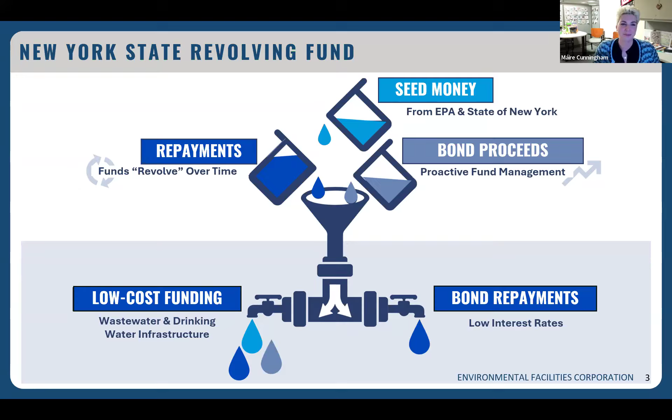We do a lot of water and wastewater projects at EFC. It's been really interesting seeing statewide the different needs that different municipalities have. As you can imagine, the infrastructure needs for New York City versus Schenectady versus maybe a small rural village in upstate New York are all very different.

We're going to talk a little bit about where your drinking water comes from, what the distribution system looks like, how that water is treated, and different aspects to the residential home. And then we will talk a little bit about the back end, about developing wastewater.

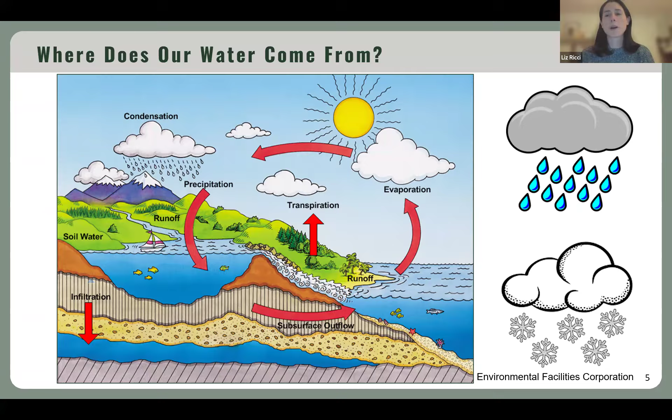So I love this picture because it makes me think of middle school or high school, but in general, where does our water come from? You're going to have this standard water cycle where it comes from rain, from snow, and eventually it will go into our surface waters and groundwater. Eventually you have runoff, evaporation, and it's just this constant cycle that will eventually add to the available water source that we have for municipal treatment systems. But for the most part, most of our water does come from rain and snowfall.

So in general, drinking water source can either be from a surface water or a groundwater source. If you're going to be building a brand new treatment system, or you have new development in an area that doesn't have municipal water, and you need to find a water source for that area, you're going to be looking at your options and determining your best source. You're going to be looking at quality, you're going to be looking at quantity - like if you're going to drill a well, is there going to be enough water to be able to provide those users that you need to serve from that well?

The treatability of that water source, how you treat a surface water source versus groundwater, is going to be very different. The New York State Department of Health regulates these public water systems and has specific requirements to make sure it's safe for the end user to drink. You can have different treatment systems for residential versus a municipal village or city, and those requirements differ because of the quantity of water you're creating.

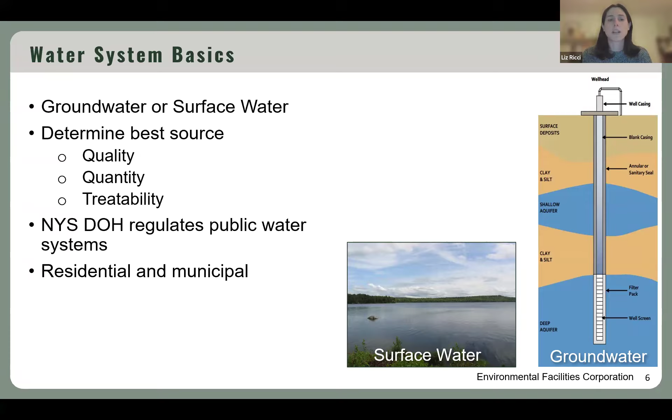So for folks on this call, when we talk about a surface water source for drinking water, we're talking lakes, reservoirs, rivers, and streams. We'll also use the term surface water on the wastewater side, for the final end discharge location of treated effluent. But these are pretty common examples of where your drinking water could come from, depending on where your municipality is located.

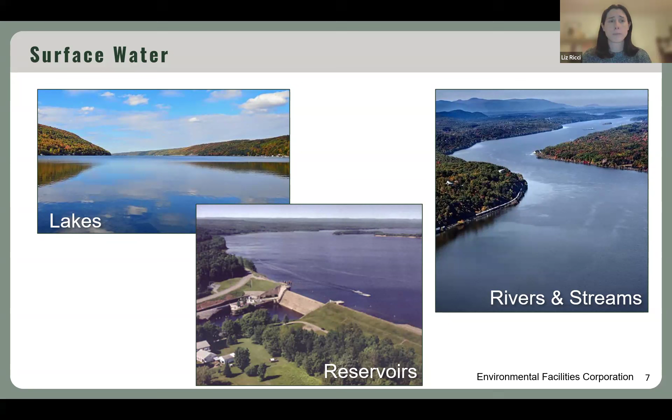If we're comparing groundwater to surface water, why would you choose one over the other? There are pros and cons to both. Groundwater generally has better water quality than a surface water source. It's more naturally protected because surface water filtrates down, giving really good water quality through that natural treatment. Less things can impact that water quality, and generally less treatment is required. For a municipality, that means it's potentially less expensive to get out to the end user, and you have more consistent water quality.

Comparatively, surface water gives you a lot more quantity than groundwater, and groundwater can be difficult to find. I've worked on projects with municipalities where they don't have a good surface water source available to them, like a lake or river nearby, so they have to depend on drilling a well for groundwater. It can be really difficult to find a well that produces enough water for the amount of users you need. That always comes into play, and it could take years to find a suitable water source, or a municipality may have a well that works fine but want to bring on more users, so they have to find a new well or a backup well, which can get complicated.

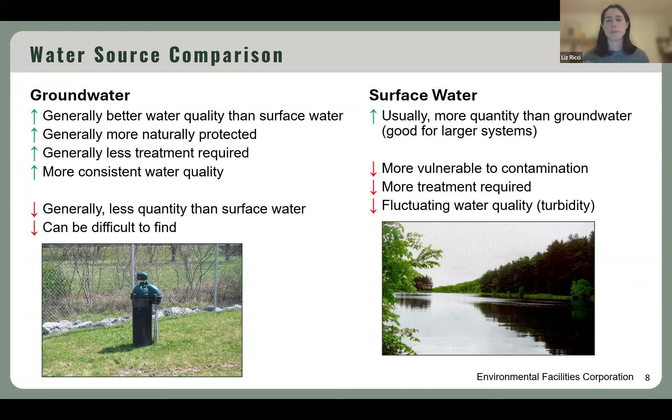Surface water is usually better for larger systems because you can find more of it. But the problem is it's more vulnerable to contamination and requires more treatment, which we'll touch on later. The water quality can also be a little less consistent. Turbidity is a big one—a river stirring up a lot of sediment, for example, may cause more difficulty in treating later on.

You may add some chemicals to the water you're pulling off a lake, for example. Coagulation helps any sediments or particulates in the water become heavy so they drop out during the coagulation and flocculation process. You're trying to get all of that to fall out so that during final filtration, you can remove those particles and have nice clear drinking water to go out to the end users.

Pretty much every drinking water source has to undergo disinfection, usually through chlorine or some other chemical. That's dosed appropriately to make sure the last user in the system is sufficiently protected from bacteria or viruses, and that the water is safe to drink. So if you're unfortunate enough to have your house directly next to a treatment plant, and you ever feel like your water tastes a little chlorine-y, that could be why.

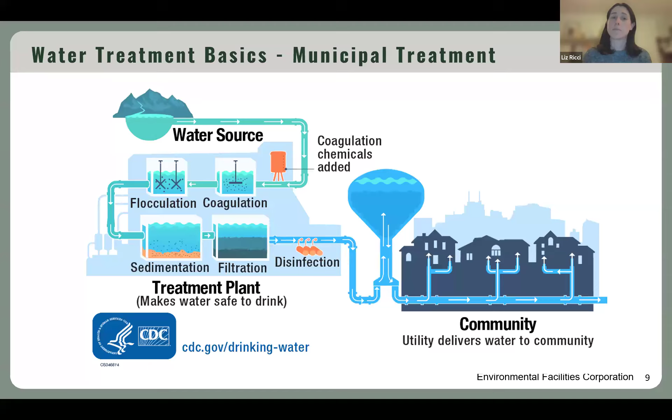Rotterdam, for example, has some really tall elevated storage tanks. Based on the hydraulics of their system, that elevated tank is required to provide pressure for your house, making sure your shower on the second floor feels good, or for fire flow protection, ensuring enough pressure that water can be drawn off the system to protect users in case of a fire.

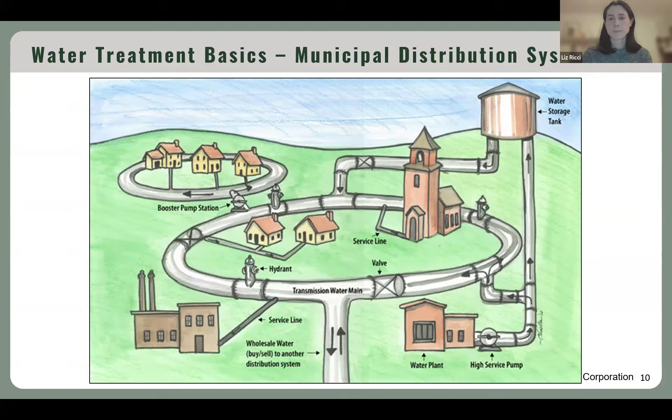It goes into information about how many people the system serves and how much water is produced annually. In the city's case, water comes from the Great Flats Aquifer via wells. This area is actually really unique - there are several aquifers throughout the state, but the Great Flats Aquifer is incredibly large, covering Schenectady, Niskayuna, and a lot of surrounding areas. Most of our water comes directly from wells rather than the Mohawk River, so we have really great water quality.

I remember working for the town of Rotterdam on a project years ago, and they had won the New York State drinking water competition for taste. Their water claimed the top prize, and they were very proud of that back in the day. So we do have good water from the aquifer, and the report will also identify how it's treated - Schenectady's water is chlorinated, with fluoride and orthophosphates added.

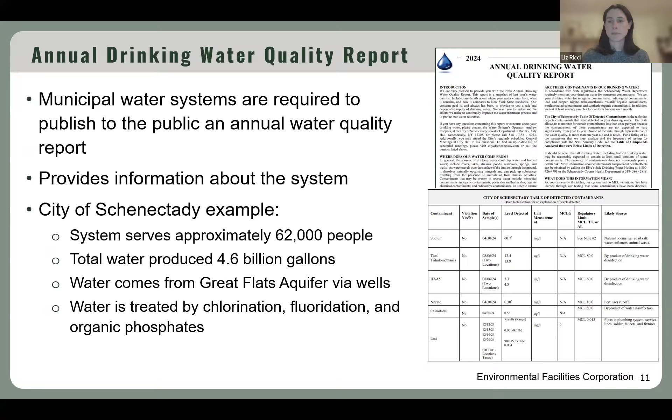In general, what goes into designing a water treatment system - I've talked about the system being sized for existing users. They factor in how many residential users, what commercial or industrial users are in the area that need water, and how much water they need. In general, 100 gallons per day per individual is the rule of thumb used to size how much water a system might use.

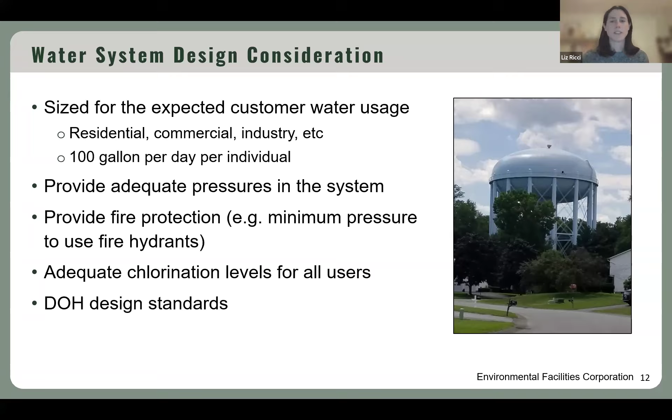The system is also designed to provide adequate pressures. There's a minimum pressure required for fire hydrants to address a fire if needed, and of course there's a sweet spot to ensure residential pressure in a home is adequate. All of that goes into evaluating a system, along with adequate chlorine levels to make sure the water is drinkable, and any DOH design standards that apply.

I wanted to add a couple things you may encounter as a homeowner and how that relates to the drinking water system. These next two slides cover a couple things I thought of while preparing the presentation - starting with a boil water advisory.

Occasionally we'll get those, especially in the winter, because that's when drinking water systems, especially ones as old as ours, face the risk of freezing water mains. With a freeze-thaw cycle, breaks of water mains are more common.

So whenever there's a water main break, the community has to put out a boil water notice, because the drinking water may have encountered microorganisms such as fecal contamination, and it compromises the water treatment that the chlorination and other treatment at the treatment plant is trying to address. So as soon as you have a water main break, you don't know what the quality of that water is anymore. The community will notify residents in that area with the boil water notice.

Boiling water for 1 minute will kill the microorganisms, so that's the rule of thumb. Once the water main is fixed and they go through the proper testing of the water quality to make sure that everything is back up to standards, then residents will be notified that they can use the water again.

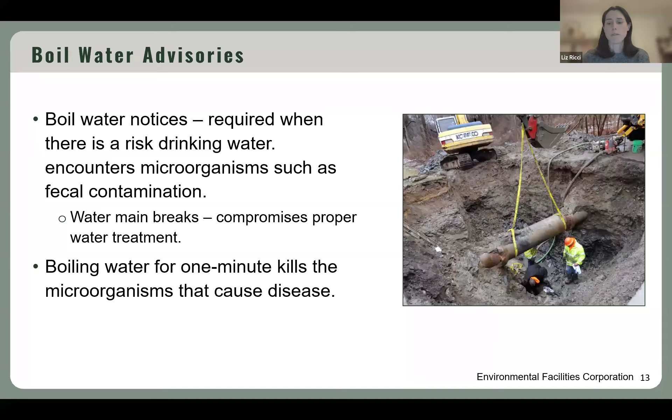Hydrant flushing is another thing that, as a kid, I remember our DPW staff going out and flushing the hydrants, and I never really understood, but I always thought it was cool to see how much water could come out of a hydrant. As I got into this field, I understood more what its purpose was.

Hydrant flushing is something that's routinely scheduled by your municipality. I feel like often it's done in the spring, maybe the fall, but it has a purpose. It's not just that sometimes you can have a leaky hydrant, but most of the time it's done intentionally, and it ensures water quality in the system. The purpose is you're removing that stagnant water in the system.

When you're designing water systems, the goal is to try to loop your system so you have fresh water constantly moving throughout the pipes. But the layout of your community might not be conducive to do that, or it just wasn't built that way back in the day. Now we know better. But flushing the system, if you have a dead end street, can help remove that water that maybe isn't getting cycled out as often as it should.

It also helps the operators exercise the hydrants too. I'm sure everyone thinks about the shut-off valves in their home - the less you operate them, the more likely you're not going to be able to open them when you need them. So by opening these hydrants and exercising the valves, it will keep everything loose and be able to be operable when the fire department needs to use the hydrant.

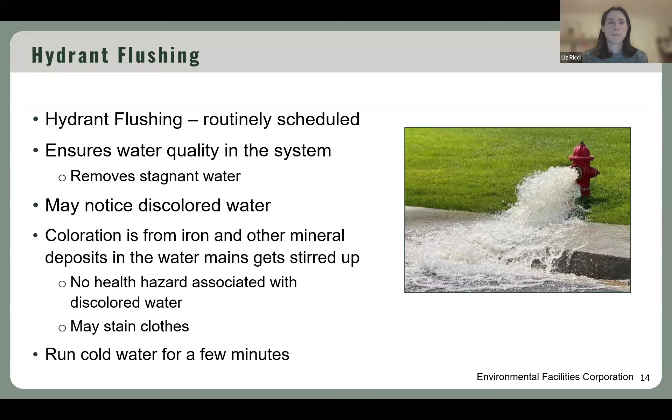On the private side, I don't know how many of you on the call maybe live outside of the city or town and have a residential or private well. I actually had a coworker that recently built a house, and she hired someone to drill a new well, and one of these common themes we've been talking about, finding sufficient capacity, was kind of tricky for her site. If you're on your own lot, make sure the well you're going to build has sufficient capacity for your needs.

It's imperative that you have proper separation distance away from your septic system to make sure that you don't have any cross-contamination. I've actually never had a house with a well, but I know from some folks that I work with, some common treatment add-ons that you might see - water softeners are pretty common to help with water hardness.

Sometimes systems have reverse osmosis, which helps remove unwanted chemicals. I think that also helps a lot with the odor of some private wells, which might have that sulfury smell. So those are some things that you might be familiar with if you have a private well.

One thing I never really think about, it could be true on a municipal well, but especially a private well because it's a smaller quantity, is drought considerations. If you have a really dry well, a very dry summer, perhaps you might experience limitation on how much water you have to use. So some things to consider: water use restrictions. I know we hear about that a lot out west, but definitely something to consider here as we go through these warmer summers. And homeowners, of course, should test their well water periodically just to make sure there aren't any issues.

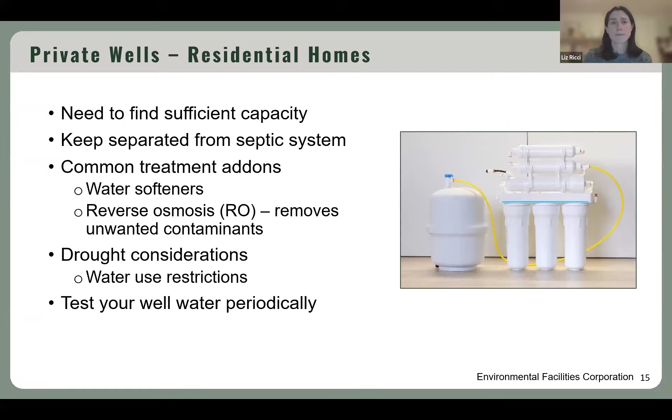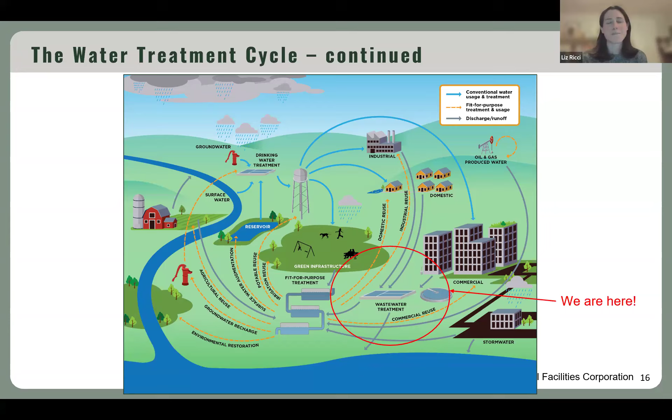Okay, so that is a very broad view of drinking water. So again, we're coming back to this cycle here, and now we're going to dovetail to wastewater. So you're using up all of your water from your municipal system, and where does that go? What does it look like on the back end?

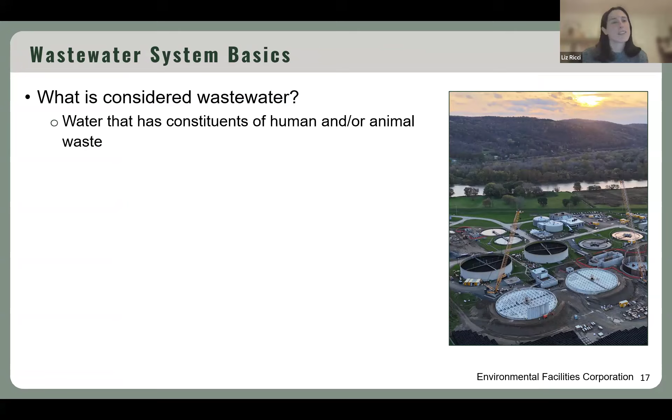Okay, so first off, what is considered wastewater? It's going to include water that has constituents of human or animal waste. Think about using the toilet, that's wastewater in a nutshell. It could include water that has residuals from cooking, cleaning, or bathing. So basically any water you're using for your day-to-day life would be considered wastewater, and of course, industrial waste. There are other things too, but in general we're going to be talking about domestic wastewater today, just what comes from the home, not really focusing too much on the industrial or commercial side, but it's all included in terms of what the municipal treatment plant would have to treat for.

The final effluent discharge—once the water is treated from a treatment plant, what we call effluent, that can be discharged to groundwater or surface water, sort of the reverse of what we just talked about for drinking water. Surface water is the most common, but we definitely have systems throughout the state that discharge to groundwater. These facilities are permitted by the New York State Department of Environmental Conservation. So the goal for these permits of the treatment plants is to protect the receiving water body. So wherever you're discharging to is what the treatment limits are going to be protective of.

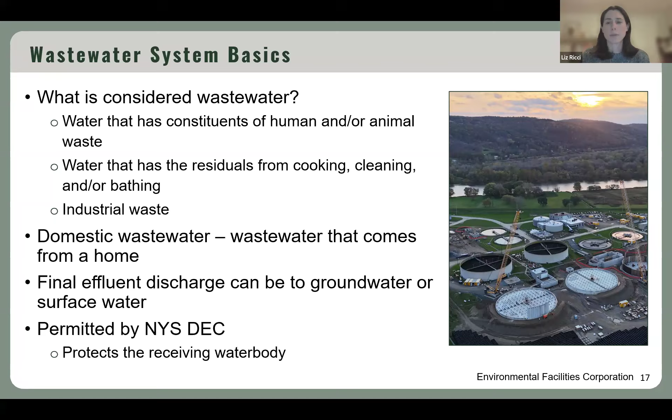So it looks a little similar to the water treatment plant that we talked about a while ago. Wastewater is more complicated in terms of the biology that goes into the treatment process. In the consulting world, I feel like we used to talk about how drinking water is easy to design, and wastewater is more complicated, mostly because when you're talking about the biological process of treating for what we call bugs, the different solids materials that come into the treatment plant, there's a lot of chemistry and biology that go into treating for the levels of, say, phosphorus and nitrogen in those constituents, and providing a clean enough effluent to go out to a waterway.

So for wastewater treatment plants, we have what we call headworks, which is number one for the bar screening, where you're removing any physical material from the wastewater stream. Grit removal, again trying to settle out as much material as you can and get that away from your treatment processes downstream. This is considered kind of a standard wastewater treatment plant process showing clarification, aeration, followed by secondary clarification. There are a lot more advanced treatment systems these days that bundle these all together in some pretty cool treatment processes, but for the most part, this is the standard example.

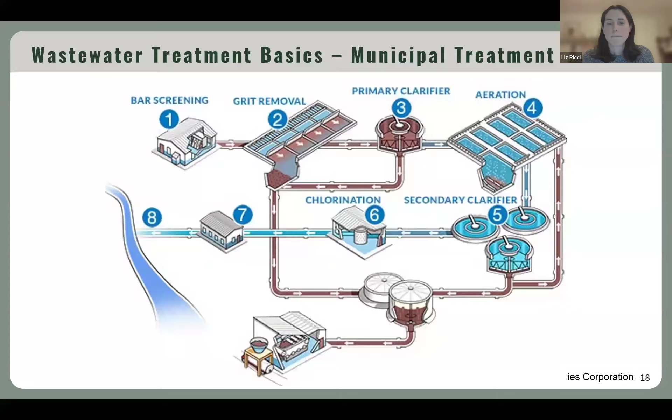Okay, so sanitary sewers and storm sewers. Similar to drinking water collection and distribution lines, there's a lot of utilities in your street. You have gas, water, sewer, and storm. This diagram explains that most municipalities have separate storm and sanitary sewer systems.

The sanitary sewer takes all your wastewater that comes from your residential home. You'll have your toilet connected to a sewer lateral, which is then connected to the sewer main that takes it to the treatment plant.

Not all municipalities have a storm system, but if you do, like in my neighborhood, you have storm drains on the side of the street that take stormwater runoff from the road to a catch basin. There's a centralized pipe that eventually takes it to a discharge location. The key is keeping storm runoff away from the sanitary sewer so you're not inundating the treatment plant with more flow than it's designed to treat.

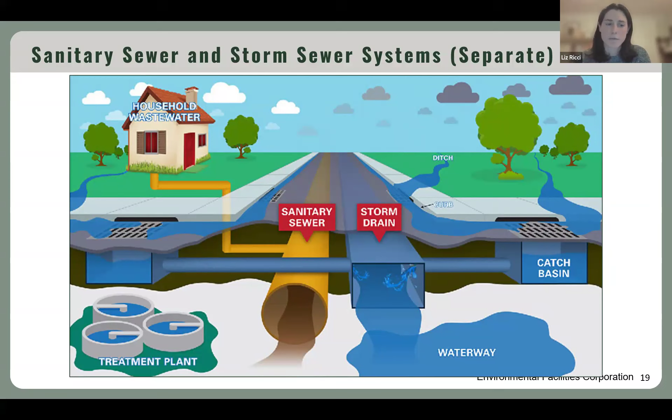There are some municipalities, usually older and larger cities, that have combined sewer systems. City of Albany has one. Syracuse and Buffalo are other examples of municipalities with combined systems. These municipalities are doing a lot of expensive infrastructure projects to separate their sewers so they would have separate storm and sanitary sewers.

In a combined system, all of your storm and wastewater are collected in one universal pipe, and normally the waste would all be taken to a wastewater treatment plant for treatment. But in times of high rain events, the combined wastewater would overflow a weir structure and go untreated to your waterway. As you can imagine, it's not ideal—you don't want to send untreated waste to your waterway.

In some cases it's diluted—it's not like you're sending pure strength wastewater to the waterways—but it's definitely not the way you would design systems now. There's a lot of enforcement action by DEC mandating that communities with excess combined sewer overflows, or CSOs as we call them, try to reduce those, because it pollutes the waterway and can cause problems for fish and wildlife. It's mostly common in larger urban municipalities and something they're trying to alleviate going forward.

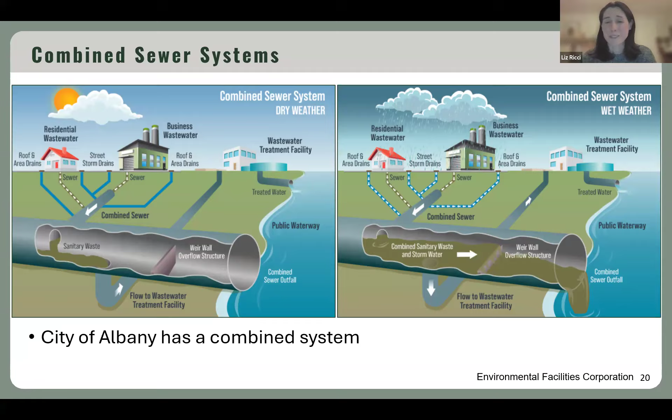But infrastructure is expensive. It's going to take a long time to separate the systems.

We talked about trying to keep stormwater out of the sanitary sewer, and even if you have a separated system, it's just naturally going to happen over time. This diagram talks about sewer inflow and infiltration, which is a huge problem for municipalities, especially ones like Schenectady and Niskayuna, where the systems are old. The material used to build sewer mains back in the day, usually vitrified clay, and those clay pipes have a lot of cracks and breaks.

How you would build a sewer system now is you would use PVC or HDPE, and over time it's not going to be as vulnerable as clay. This shows there are locations where groundwater can get into your sanitary sewer through broken sewer laterals. If your house is anything like mine, I have an old sewer lateral that gets root intrusions from my tree, and if I'm not careful I have to snake my line—it's a pain.

The reason you don't want stormwater into your sanitary sewer is that it inundates the treatment plant, which wasn't originally designed to treat that flow, and it's really expensive to treat that much water if you don't have to. So it's really about coming up with ways to rehabilitate the sewer and avoid those connections.

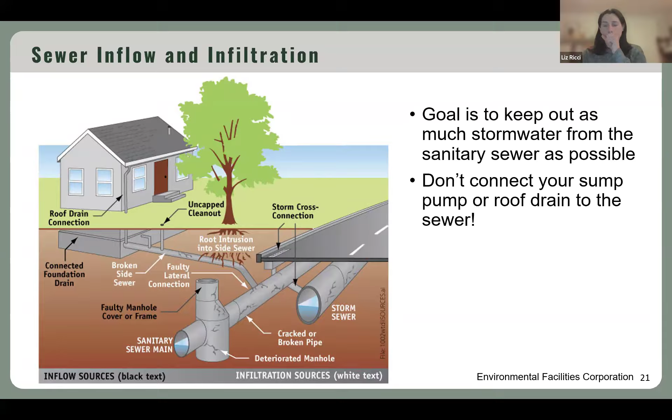Okay, so again, some things to consider here. Sorry, I'm losing my voice a little bit.

So again, similar size, about 100 gallons per day per individual. The treatment level is going to be dependent on the receiving water body. Say you have a treatment plant that's discharging to a trout spawning stream or a large lake, your treatment levels are going to be different. You might also have different watershed priorities, so phosphorus reduction, for example, in the Chesapeake watershed might be different than somewhere else. But the goal for DEC, especially who has the permits, is to eliminate pollution to maintain the highest water quality, to help protect public health, recreation, and fish and wildlife. So if you're discharging a wastewater effluent to a water body that has a lot of fish or other animals, you want to make sure there's enough oxygen content for them. You're not making the water warmer than it should be. There's a lot of things that come into play with discharging a treatment plant.

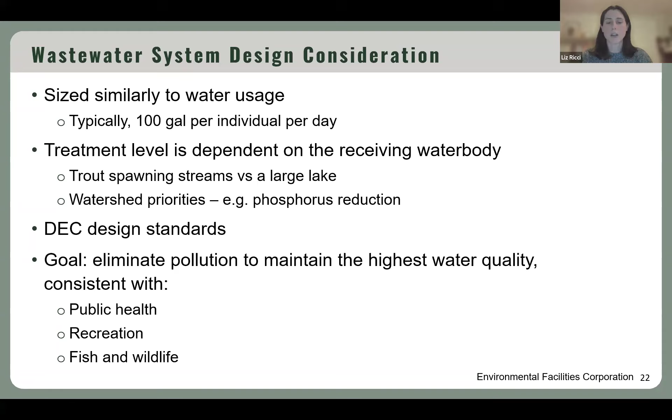And I wanted to throw this in here. I've been using myself as an example for a lot of things, but if you're thinking about, do I have to replace my sewer lateral, or I have a problem with my water service that goes to the house, whose responsibility is it to fix it? That's kind of tricky because it's going to depend on your municipality and what the rules are. But generally speaking, the homeowner is responsible for the sewer lateral and the water service line on their property up to the point it connects to the municipality's water line or sewer main in the street. So just something to keep in mind, so you're not like me calling the municipality to ask them to fix something and have them find out, oh yeah, sorry, I guess it's my responsibility. But every community is a little bit different with how they own and maintain the infrastructure, so it's good to understand what's in play for your house.

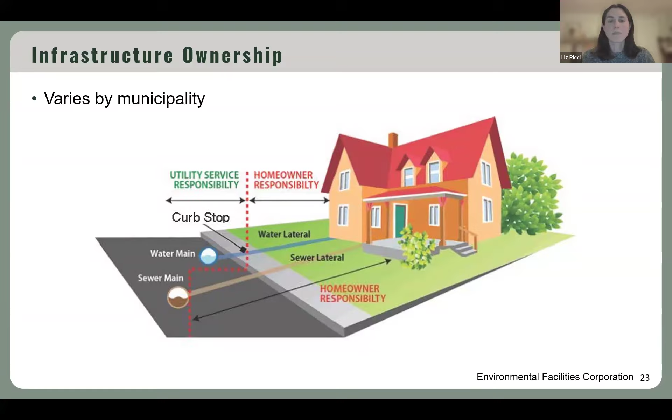Okay, so we talked about municipal wastewater treatment. You could have your own system, you could have a septic tank. This has a couple graphics to show what that looks like. For a septic system, you're going to have some form of a tank that kind of mirrors what we talked about for the wastewater side of municipal treatment. You're trying to have the heavier material settle out. It's going to flow over that baffle wall and then go out to some form of a drain field or a leach field on your property and eventually flow down into groundwater.

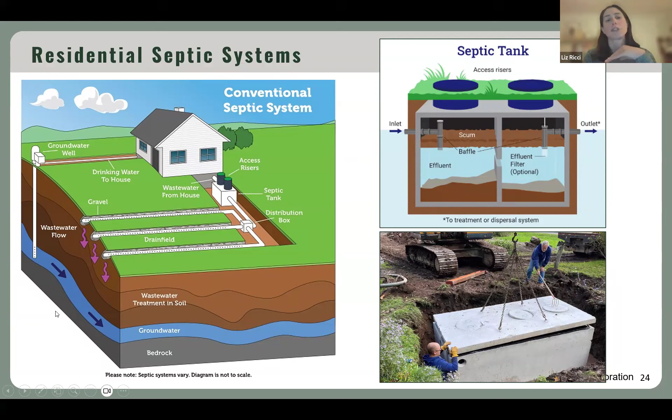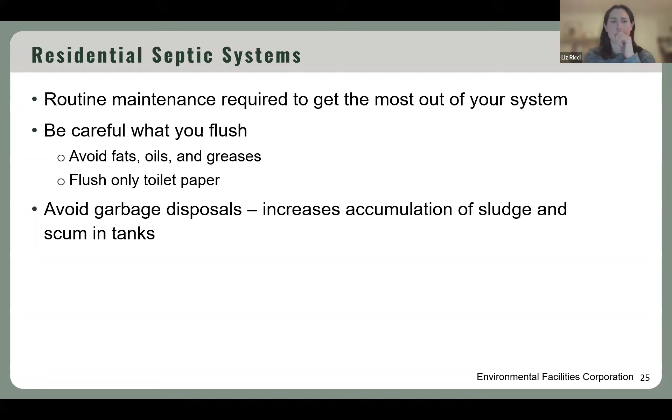So I can't stress enough, if you have a septic tank, just make sure you're thinking about routine maintenance to get the most out of your system. That usually means having someone come pump out the material every 3 to 5 years, for example. Be careful what you flush. Septic tanks are very susceptible to fats, oils, greases. You really don't want anything that's going to just fall out, like only flush toilet paper. If you flush any heavier materials, it's just going to sit in your tank and cause you problems. Even those flushable wipes, they're not flushable. They get caught up on stuff and cause a lot of problems. And garbage disposals are not great either.

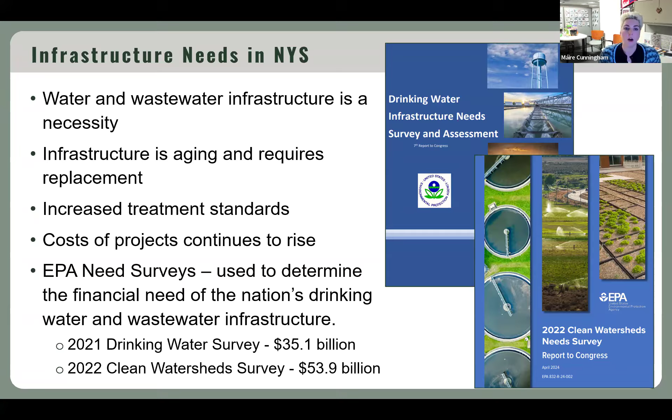Obviously our programs are oversubscribed. There's no way we would be able to immediately fund $53.9 billion in need, but we try to do as much as we can. In the last year, we were able to fund $3.4 billion in infrastructure projects, giving that out in the form of financing and grants. So it's small in comparison to $54 billion, but it's a lot when it comes to the size and scale of infrastructure projects that are starting or being upgraded.

So what does a project look like? I'm sure a lot of you have driven or walked past infrastructure projects for sewer and drinking water systems in your lives, and wondered what's going on. So we thought we'd give you a little overview of what project planning looks like for an infrastructure project.

When municipalities are thinking about starting an infrastructure project, whether drinking water or sewer, they want to identify the project first. A lot of municipalities will go through their priorities - what are the areas of the system that have needed upgrades for years, in some cases decades - and identify that as a priority project to look at.

The next step would be to assemble a project team. There's a lot of people involved in these infrastructure projects at the municipal level alone, and then you've got everybody else involved, like EFC, DOH, and DEC. At the municipal level, a project team would consist of the municipal staff - all the people who will work on these projects day to day.

Most municipalities will have an engineer, either in-house or a consulting engineer, who will help them design the project and come up with the best path forward - the most affordable and best use of resources for whatever project has been identified.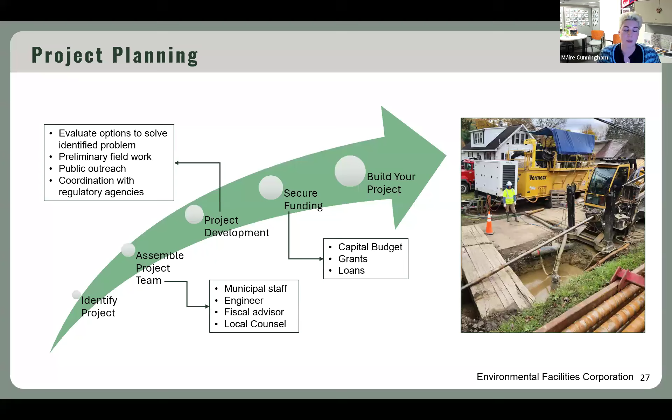So just to talk a little bit about project planning - what are the things needed for a project to be successful? You initially need an engineering report, developed to evaluate the options and determine the best project to solve the problem identified.

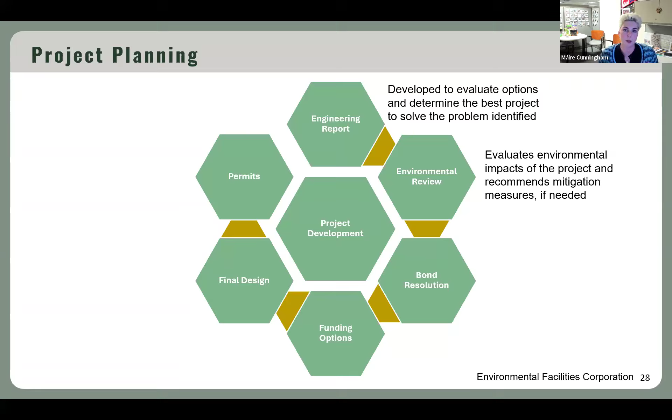Next step is the environmental review. You want to evaluate the impacts of the project, making sure you're recommending any mitigation measures if needed, and that the project is not going to disrupt the environment in any significant way. We want our infrastructure updated and working appropriately, but we also don't want to harm the environment - we want to protect and conserve it as much as possible. That's a key component, making sure we're not harmful to the environment when doing these infrastructure upgrades or building new systems.

You would then need to look at a bond resolution. This allows the community to borrow funding for these very large scale projects, but it also notifies the public about how much the project is going to cost.

What does that mean for every ratepayer, homeowner, resident of the area? That needs to get approved by the community before the project can move forward. So for EFC, an approved bond resolution is required before we can even provide any kind of funding or evaluate it for approval for funding.

So it's a really important component of the process. And then you look at different funding options to try to make it as affordable as possible. We provide a lot of insight and guidance to communities for their projects to make sure we're trying to fill the gaps as much as possible. Obviously a lot of communities would like grant funding, and we'd love to give as much grant as we possibly can, but we're always oversubscribed in our grant programs. What's nice for EFC is we have this financing component through the revolving fund, so we're able to pair those together to try to fully fund these projects in the most affordable way.

And then you have final design, which is when the selected project is fully completed. It's been assessed, they picked their alternative, they know what they're going to do, and the engineer, the consultant, or the in-house engineer for certain municipalities will start the project. So that's what they put together. They know how much it's going to cost, they know what they need to do, and they're ready to move forward. So once they're ready to move forward, they have that final design.